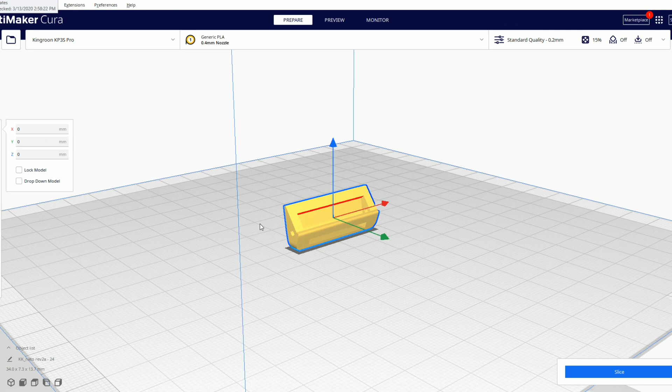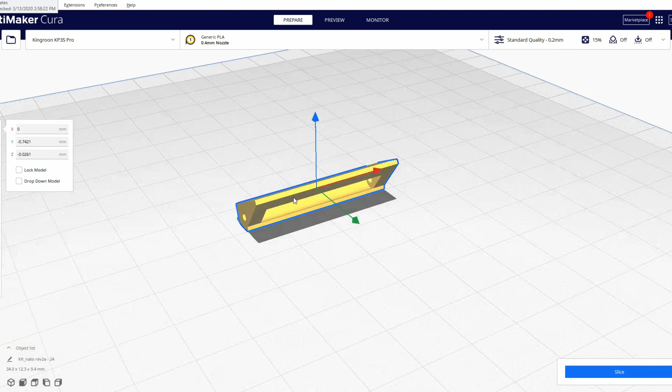Okay, I'm just going to go over a quick overview on what your file should look like in Cura or Slicer or whatever program you are using. The best way to print this, I have found, is to print along this flat side right here where my mouse is moving. I usually lay it flat. This is the correct orientation that it should be printing in. That's the strongest way that I have found.

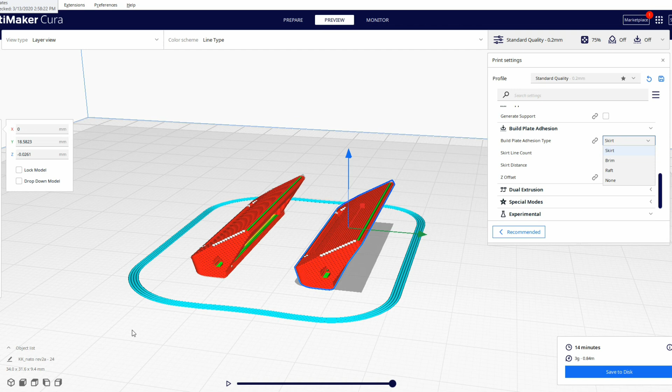They print pretty well like this, but you can set them side by side if you want. I usually, with my quality at 0.2, you're going to want to do 75. You do not need support. Build plate adhesion depends on, of course, your printer. I can get away with a heated build plate and no brim. However, using a brim is probably a good idea until you can dial in your settings. I always put a little bit of a distance so I don't have to clean up the edges. This right here will get you the type of prints that you want.

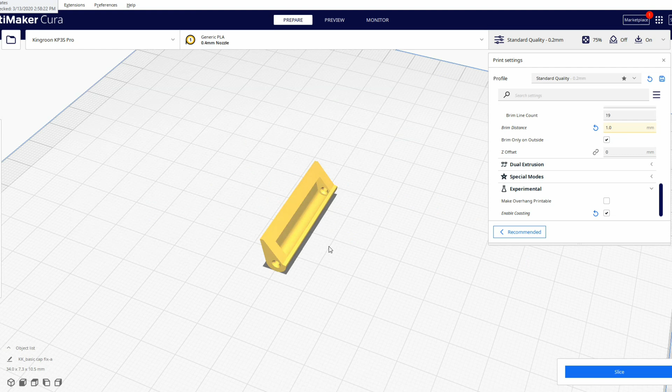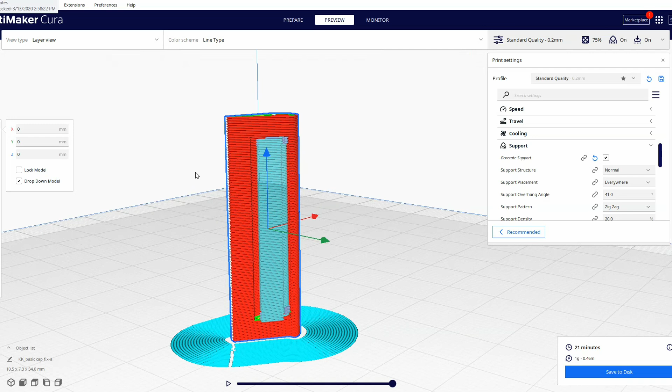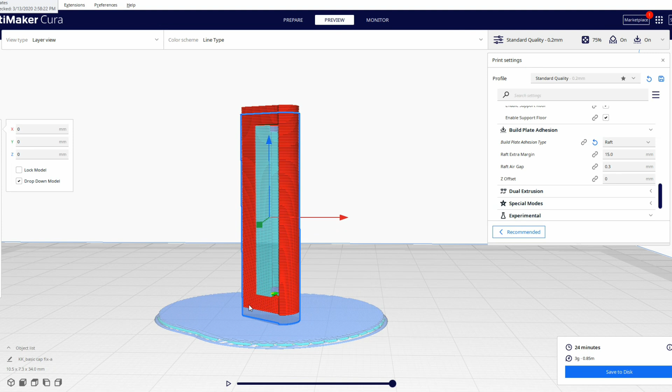Now, for a basic cap, you will want to print it vertically. This one, you will need support because it is very annoying trying to print this in such a way that doesn't require a lot of cleanup without a support. And this will print you a pretty darn clean piece. Again, you can use a brim. Sometimes it'll lose a layer or so when you print with just a brim directly onto the build plate. So sometimes you do need to use a raft. And that will just kind of help that first layer there not elephant foot out. Just be aware of that.

Of course, you're going to want to do 2 of these. I usually print them like this. Tree also works. Sometimes that is a lot easier to remove. Just make sure that it doesn't go inside of the hole there. It's just something to keep in mind. There you have it. I hope that helps.

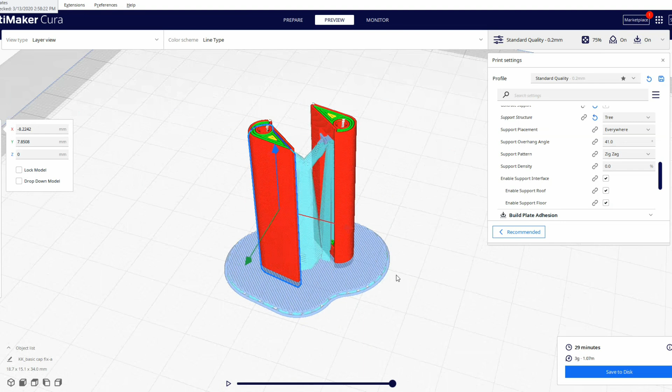So we're going to talk about how to insert the mod. This is a very tight fit. I have gotten it down to the point where it is quite difficult to insert, but that's because if you don't, it wiggles a little bit. So there are some things to keep in mind when you insert this mod. You're going to want to really make sure that it is pushed in absolutely all the way.

The holes, when you look through, will not appear to line up exactly, but you should be able to see through to the other side. If you don't, I'm not sure why that would be. Maybe there's a piece of plastic. Sometimes plastic gets stuck in some of these little areas here. So you might want to see if you can insert the pin in the first place. It can get stuck at this point right here if the pin is pushed down this way, so you have to push it away from the watch sometimes to get it through.

So you're going to want to put the mod in as far as it can go. Push down on the side that you're going to start the pin with and push it through right here. For me, this is very easy to do because I have inserted and taken out these things so many times that it's very easy. Let me use these pink ones for easier viewing.